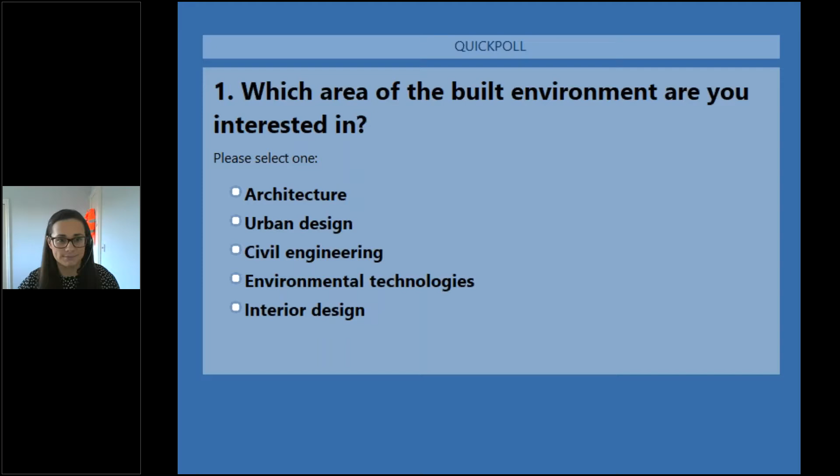And that's great, and we'll just see the results now. So 6% are architecture today, so that's great to know. And then we've got a few urban designers and also a few in environmental technology. So that's really good to know.

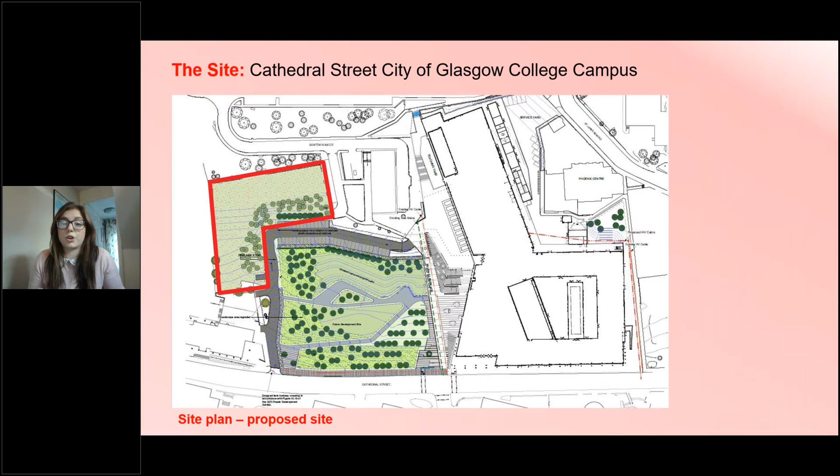So finally, moving on to the site illustration. You can see the site has tall buildings next to it. How will this impact your design and your use of, say, renewable energy sources such as solar and wind?

As well as this, you'll want to think about how your building looks. Will it complement the surrounding buildings? You obviously want it to be something that if you're looking out from the next door buildings, that it's nice to look at.

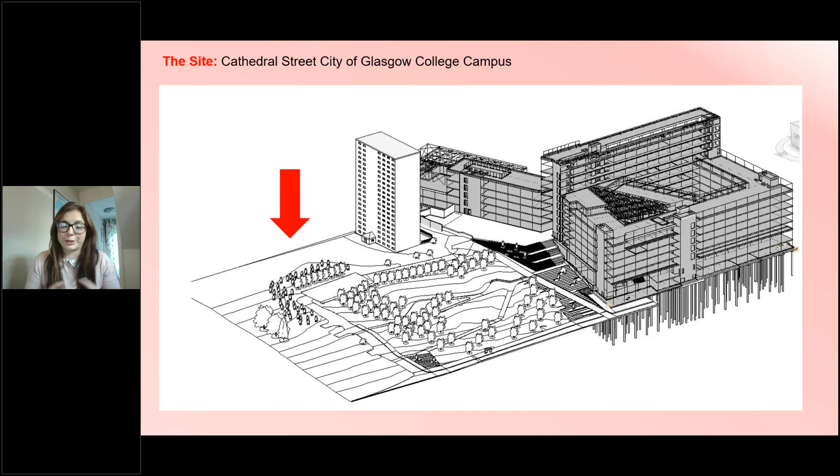So I'm going to move on now to talk about some of the things you might want to consider when developing your sustainable designs. I'm going to cover materials, construction methods, demountability, and green energy.

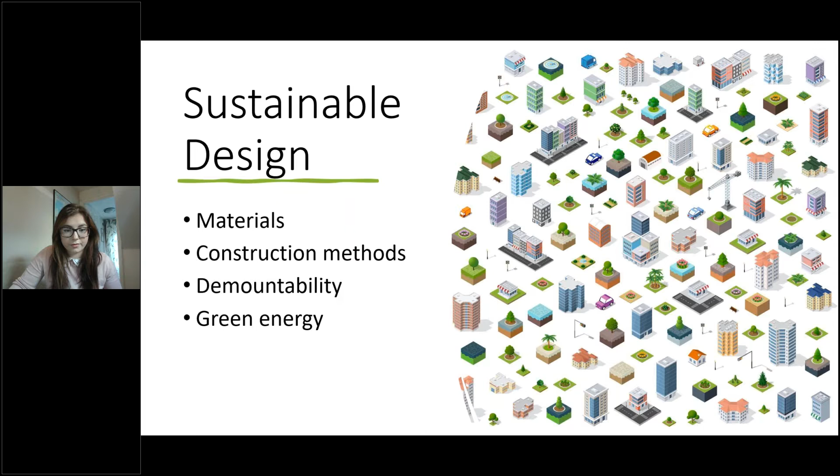Starting off with materials and material efficiency, it's important to think about the global warming potential of different material types. This is basically the carbon that 1 meter cubed of material results in from its natural resource extraction and manufacture. So the first two examples, steel and concrete, have a positive global warming potential, which means that they add carbon to the atmosphere. Whereas compared to the two materials on the right, mass timber and raw timber, they have

a negative global warming potential, which means they do the opposite - they remove carbon from the atmosphere. So when you're trying to design to net zero, it's really important that you consider the carbon and energy required to make the materials you're planning to use.

Similarly, it is also important to think about material efficiency. Now, concrete is often thought of as one of the most harmful construction materials to the environment, which is the case. But when reading this slide, you might think that it's actually steel. However,

this is where material efficiency comes in. You need less steel than you would concrete to design the same building. Therefore, the volume of concrete would be significantly higher than that of steel, resulting in a higher level of carbon generation. You could say, well, we should always design with timber since it removes carbon, which as a timber engineer, I'm an advocate for. However, it's also good to keep in mind the limitations of timber, such as its structural capacity and material variability due to it being a natural resource.

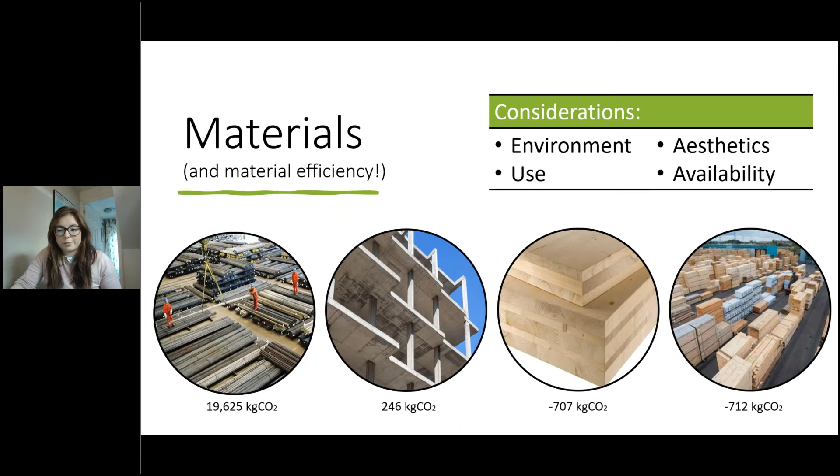So moving on to construction methods. The brief states that you should look to adopt modern methods of construction, or MMC for short. This is a process which focuses on adopting off-site manufacture and prefabrication. MMC encompasses a number of construction forms. These include panelized, volumetric, components, and hybrid systems.

Looking at these in a bit more detail, the panelized construction, which you can see on the top images, involves manufacturing individual wall panels off-site, then transporting them to the site and lifting them into place. These panels can have different levels of completion, where you could have a basic open panel, which would be just the frame and one sheet of OSB, which is completed on-site, or a fully closed panel, which contains all the finishings, such as insulation, plasterboard, and even windows, resulting in very little work required on-site to finish the panel.

Volumetric is similar to the closed panel system, except the full four-sided module is manufactured off-site, then lifted into place, which you can see on the bottom there. These tend to have the highest level of completion off-site, where the fixtures and fittings, such as bathrooms and kitchens, can be installed in a factory.

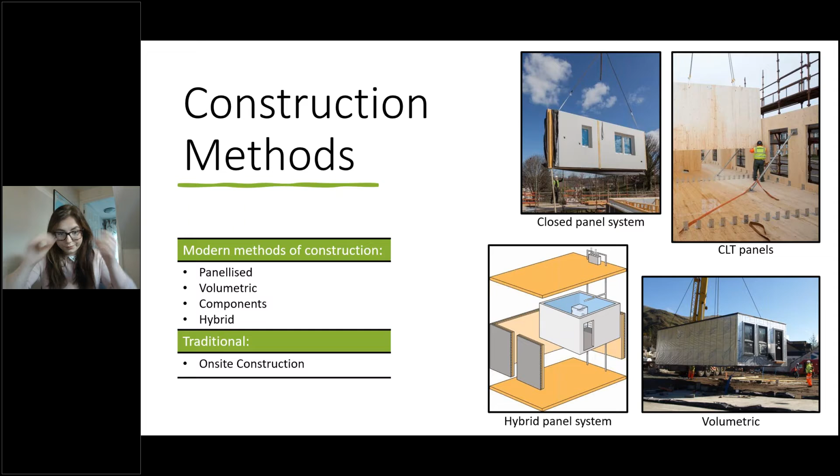As part of the brief, you are to create a design that can be relocated. Therefore, you have to think about how it can be disassembled and reassembled. Design for deconstruction is not often considered, and therefore pre-existing examples are limited, so you'll really need to think out of the box here. This is where collaborative working will be really useful.

Some key considerations include using reversible connections, such as screws, bolts, and blocks, which can be easily removed without damaging the surrounding material.

I have a few examples of this. The top image is the COP26 demonstrator house, which was designed with the full intention of relocation after COP26. This might be a really good case study for you to look at for inspiration.

Similarly, the bottom picture utilises a block system which enables disassembly and reassembly of CLT panels. This house was constructed on the Heriot Watt campus in Edinburgh and then deconstructed and shipped to Dubai for a student competition.

When designing for deconstruction and reutilisation, you should avoid the use of irreversible connections such as glues and welds. These are virtually impossible to take apart without destroying the surrounding material. Finally, you need to consider the steps you would take to demount and reassemble. Would you reverse the connection steps, or would you take a different approach?

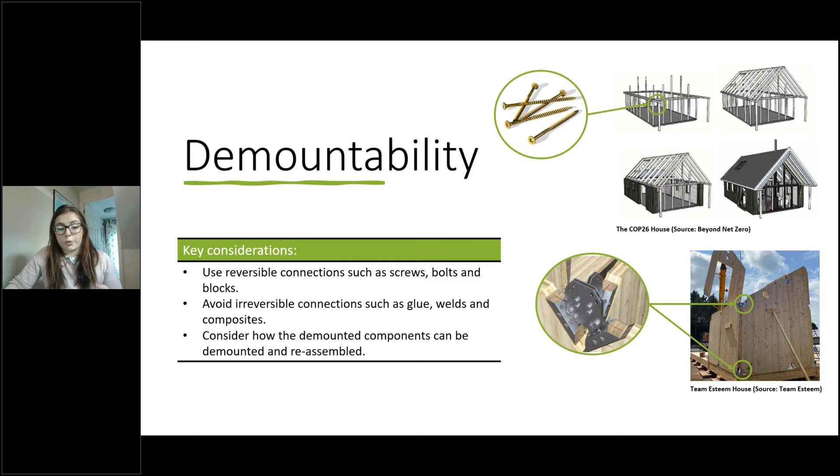Moving on to my final slide on green energy, it is critical that your design is powered by renewable energy sources. There are now a number of renewable options you could utilise, not all of which are included here. For example, you could use solar or solar thermal, air or ground source heat pumps, or biomass boilers.

You will also have to consider this when deciding the system to adopt. What sort of space availability do you have? Heat pumps take up external space and biomass boilers take up internal floor space, so that's something to bear in mind.

As well as this, you will have to consider your energy requirements. Will you need more than one renewable source? Is the source you've chosen reliable all year round? For example, is there enough solar resource, or do surrounding buildings have an impact on this?

Finally, for an energy efficient home, it is vital that you consider ventilation requirements. Can your heat source work in reverse and provide ventilation? These are all useful things to consider in your design.

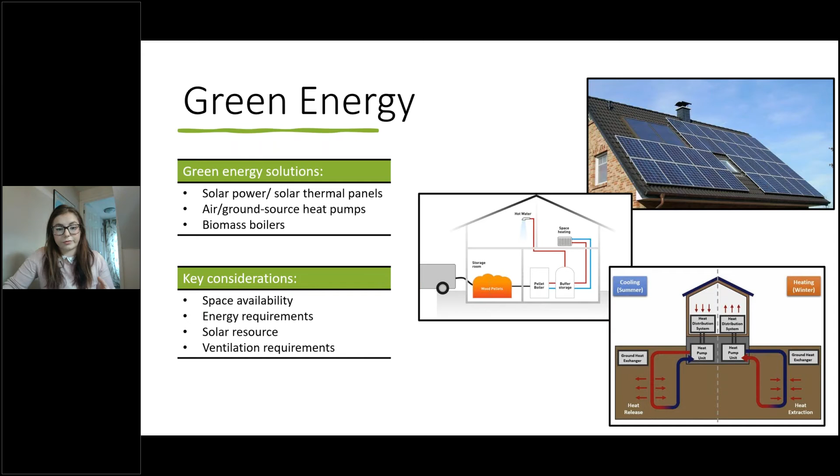So to summarise, I have included a list of references for the things I've spoken about, as well as some case studies, particularly on the demountable side of things, because they're a bit harder to come by.

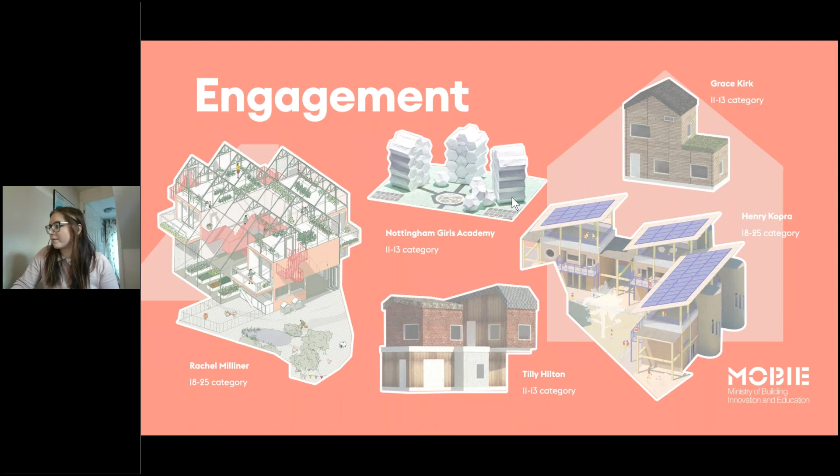We've engaged with a number of challenges over the years, and this was just a couple of quick slides showing some of the winners. This was actually the winner of the Home of 2030 competition, which was really an urban community, a self-sufficient living project on a derelict site in the middle of Nottingham.

Now my slides won't click again.

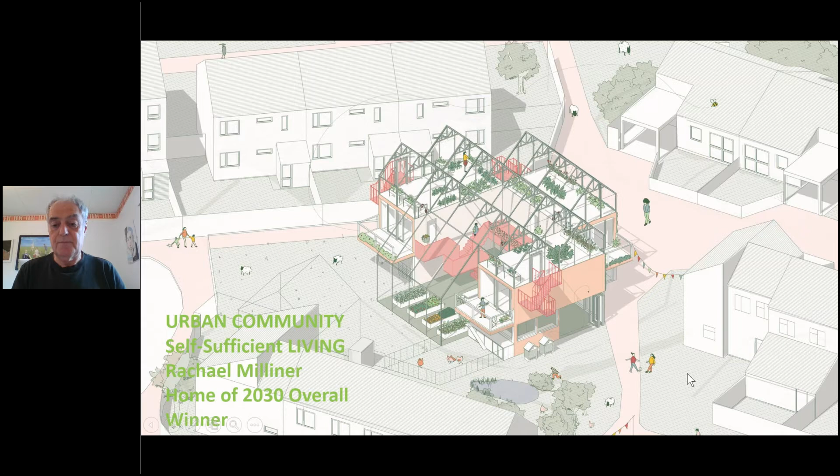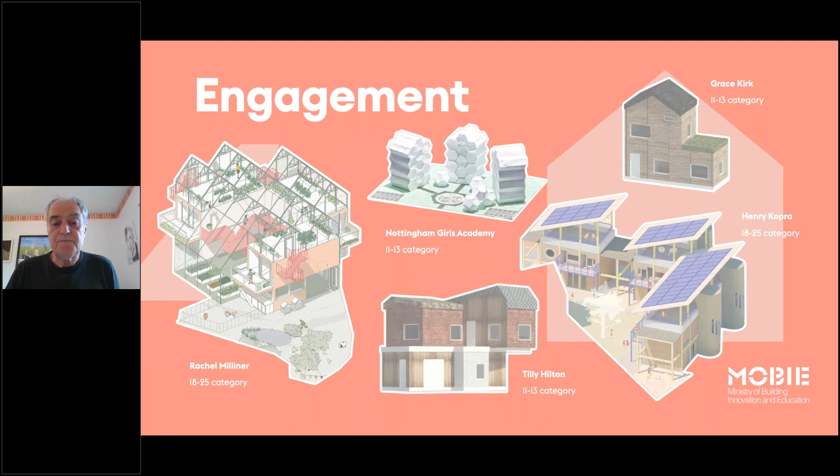This one also shows a selection of the winners of previous challenges, from 11 to 13-year-old girls from Nottingham who won our very first challenge. We've got some of the modular 3 metre by 3 metre pods that were built by robots. We've got Rachel's, a social housing project for single parents and their children, again totally self-sufficient, again built on a derelict site. And just a quick slide to show you how these challenges can be rewarding.

This was the 3 metre by 3 metre pods that were developed for the Construction Innovation Hub and the Manufacturing Technology Centre, and the brief was for these pods to be built by robotic arms, with the idea that you could start off with your partner with 1 or 2 pods, a studio apartment, and as your family grew you could add pods to it.

These were relocatable, but the Construction Innovation Hub put quite a lot of money into the research to develop this, and these lucky students, who were HNC students from a college in the Midlands, had the privilege and the honour of having their winning design developed as a prototype and put on display at UK Construction Week. So in terms of a prize, it was pretty good.

We are also working in Scotland with Twinkl. You may not have heard of Twinkl, but they are creators and resource generators for primary schools, and they work across the globe. They're working with us at the moment on an architecture and built environment program, and we've used some of our previous challenge winners to develop the videos. We've got a whole range of videos, question sparks, and little challenges on how you can use shoeboxes or cardboard boxes to demonstrate the things we're asking you to build, such as insulating a home or recycling rainwater. This is launching later this month - a really exciting opportunity to involve young people. It's piloting in Scotland, then going out to the rest of the world.

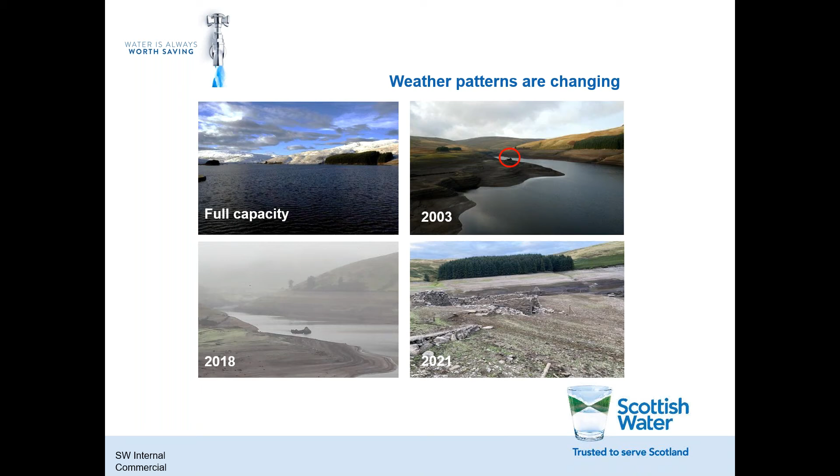So why is it important in Scotland to think about the way we use water? After all, it supposedly rains all the time. I thought I'd bring up a few pictures from a reservoir in Fife - this is Upper Glendevon Reservoir. It can store a huge amount of water, around 5 billion litres, as you can see in the top left picture, and it looks fantastic when full. But in recent years, we've experienced extended dry periods which have had considerable impact on the available storage within that reservoir. You can see in the other photos, from 2003, 2018 and 2021, some fairly serious impacts from drier periods. I've used these pictures for effect, as there are other reservoirs downstream that weren't so bad. But last summer, we experienced the driest period in the 160-year record for Scotland, and this was one of the results. This demonstrates that we need to come together to plan across the board so we can impact less on the natural environment.

I thought it would help as a takeaway to give some facts and figures, and also some links which will hopefully be put into the chat as I'm going through, to help you think about water use and its value.

Let's start with Scottish Water. We only have access to 1% of all the rain that falls on Scotland. We don't have access to every reservoir, loch and river, as some people may think. As individuals, we're all using around about 165 litres of water a day.

That's more than the volume of 550 cans of juice, to put it into some context. And at the height of COVID restrictions, this was more like 200 litres per day for every person, because we were all spending more time at home.

To help you think about what your family uses, I've dropped a link in one of the bubbles, and it will be put in the chat, to our water use calculator found on the Scottish Water website. Take a look at that and see how much you use as a family. It might surprise you, and it might also give you some good ideas where you could make some savings.

Another main stat that I always bring out is that the water and wastewater service we provide, and the way we all use water in our homes, accounts for 6% of the UK's total carbon emissions. That's the equivalent of the aviation industry in the UK. If I break that down further, 1% relates to water and wastewater processes, and 5% relates to heating water in the home.